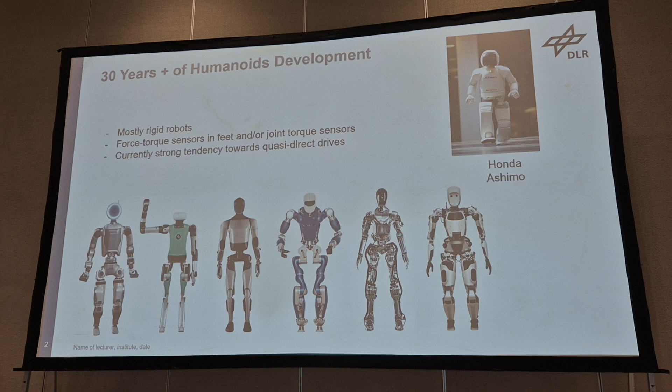Now, I wanted to talk a little bit about this topic of the humanoids, and also discuss a perspective where I would like also to hear your opinion about that, because it's such a timely topic. We see those very impressive robots downstairs, and we have developed this for maybe 15-20 years with model-based approaches. Now it goes more and more on learning, reinforcement learning, and other approaches.

And I'm asking myself, what's still the role of models and model-based control, and how does this interact with the learning approaches, right? The argument I would like to make is that I think that especially for the humanoids, which are also larger, not like the Unitree, which can easily fall down and break, having a solid model-based ground on top of which you put learning is the most stable or promising approach, right?

But I wanted to discuss also what's the technology, right? Because we started with ASIMO like 20 years ago, and this was a purely position-controlled robot with a ZMP approach and so on. Then what we pushed forward is something based on force torque sensing in the feet and in the joints, and a passivity energy-based approach.

Of course, we see the strong tendency towards quasi-direct drive, where you don't even need to model too much, because you hope that the reinforcement learning will take over and compensate for all the model disturbances. But on the other side, what we have done over a long time is a different approach, where we would like to control the energy and to store and recycle the energy. And I would like to give you some of the ideas in there and try to popularize this.

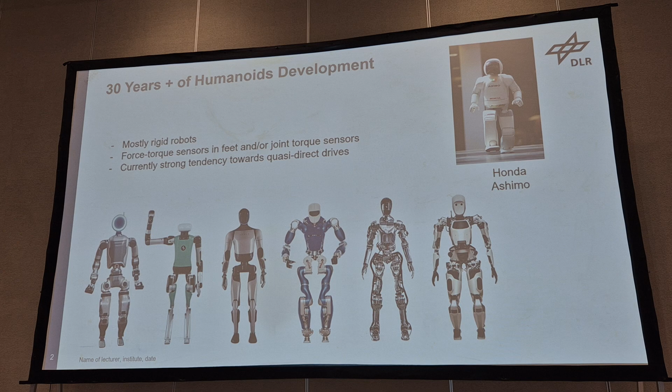So actually there were two trends, right? One is those rigid robots, and now quasi-direct, where you would like to have an actuation which transmits immediately to the rigid body model. And the other is motivated from this very early work, which shows that exploiting the intrinsic passive dynamic has some sense, right?

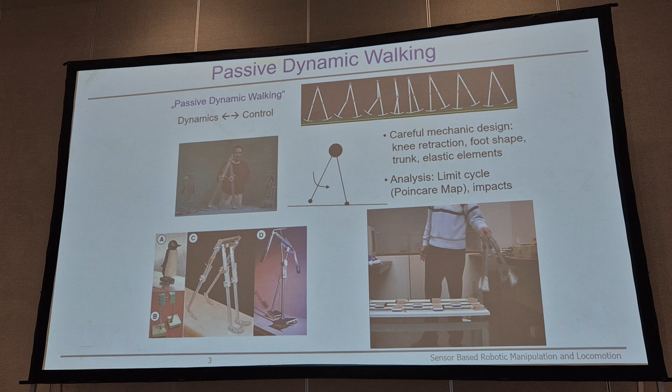This is a purely mechanical system driven by gravity, and then all this work which has shown that having springs and storing energy is useful, right? And also those Paralympic athletes, they use the energy of the spring, and they can run and jump farther and faster than even normal athletes, just because they learn how to exploit this energy storage. So obviously, having compliance reduces impacts and so on, has some advantage.

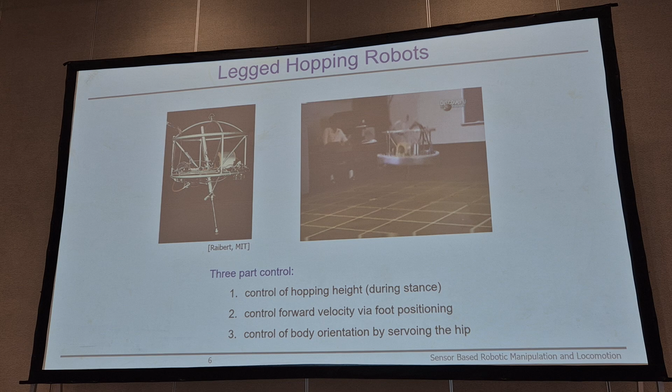We had here, however, the talk of Marco Hutter, and he said those simplified models were always a strong limitation. And now you can use reinforcement learning, model the full dynamics, and learn on that incredible behaviors, right? So how to reconcile? And actually, when robotics started, this is one of these famous videos of Marc Raibert, right? They had this concept of using compliance, using intrinsic energy, and having very simple controllers which just excite the energy in those systems. So what happens with the two directions?

And is there a way to reconcile this direction of rigid robots, where we have just rigid body dynamics and try to learn, and then the approach where you use intrinsic dynamics? And I think having an approach which models the energy flows and looks at those and uses them for control is maybe a key to that.

So the first part, I would like to say a little bit about how we are controlling our humanoids. Probably you are more familiar with the cobots, right? The cobot technology, where you have joint torque sensing and you have a very high quality torque interface, right? And you can use model-based control. You have compensation of friction, you have compensation of gravity if you want, and you have precise models of the robots, right?

And this was key for the development of cobots. If you know the KUKA lightweight robots, our humanoid TORO just has the joints of 4 KUKA lightweight robots, and then it was built within maybe 1 year. And I think a key contribution here was a paper by Christian Ott and Máximo Roa and others at Humanoids 2011, where he said, actually we could put together the whole methodology which has been developed for grasping and manipulation, and for locomotion.

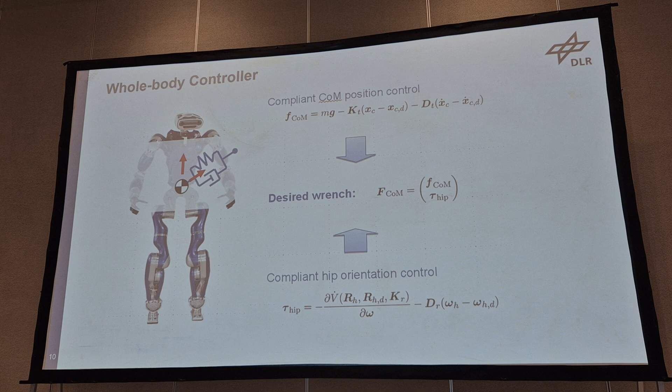So the most basic, simple controller which we have in order to control the center of mass is you define springs and dampers, so the classical impedance control for the center of mass, for forces and orientation. You have a desired wrench, right? Of course, you can very well describe the energy stored in that spring, the dissipation, and so on. So making a Lyapunov function and stability and convergence analysis is pretty straightforward.

And then what you have to do is to distribute these forces on the various contacts. It can be the legs, but it can also be multi-contact with the arm, and so on. You can use optimization tools, basically, and model the unilateral constraints, the friction cone constraints.

So basically, you have a force distribution problem, as you have the force distribution problem when you manipulate objects with hands, right? You need to distribute the object force on the fingers. Here you have to distribute the center of mass force on the feet and the arms. And then from there, you just use the Jacobian transpose to go back to the joints. So it's the same framework we applied everywhere.

And again, by monitoring the energy in the springs, the energy of the rigid body system, and constructing a storage function, you can prove dissipativity and stability and convergence and all these things, which are not a little thing, right? Being able to prove that the robot will always be stable and converge to a trajectory, I think it's essential for safety and certification aspects at the end.

And the approach, I mean, here you see some examples. This is Bernd Henze's PhD thesis. I mean, several best PhD Georges Giralt thesis awards came out of this framework. So what you see here is indeed this multi-contact, which I have told you about, right?

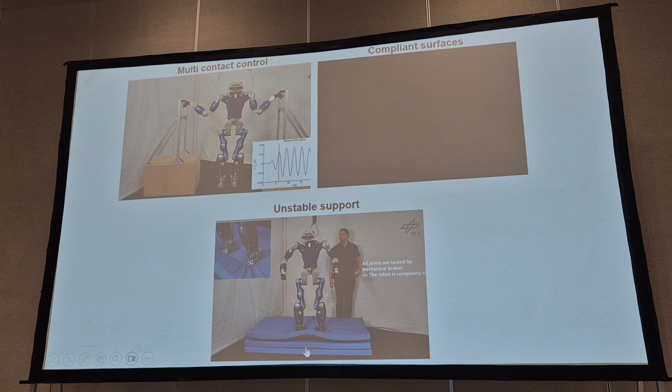So this mattress, of course, is a passive environment, so you can at least prove passivity and then stability and convergence. And you have all these hierarchical control approaches which have been pioneered by Oussama Khatib and Bruno Siciliano and the generation of roboticists in the 80s, but really working on the real system because you have this torque interface.

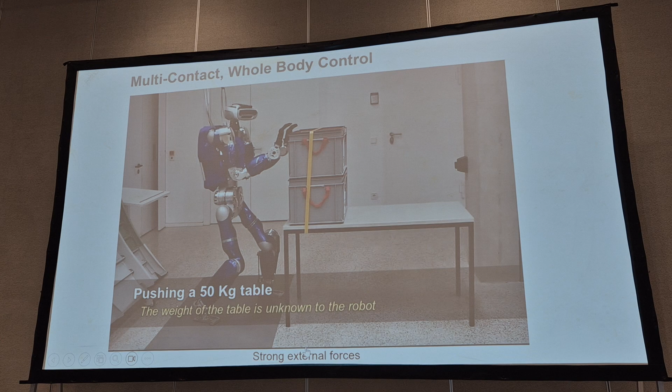And again, interacting with passive environments, right? You have a robot pushing a weight of 50 kilograms, and things do not get unstable because, again, you have full control of the energy in the system and the amount of energy which you inject.

And still staying in a model-based framework, of course, what do you do with the center of mass? You can control it to a certain point, but you need to do planning too, right? And actually we came up with, I think, a very clear and straightforward way of implementing a planner for the center of mass. The point with the center of mass is that half of its dynamics is unstable.

So it's a simple second order dynamics like over here, right? But you can split it into a stable and unstable part. The unstable part is just the pendulum falling down, right? And well, I cannot really go into the details, but the contribution of this framework is that instead of dealing with dynamics, so with differential equations, you know, computer science people don't like differential equations so much, they turned it into a geometrical problem.

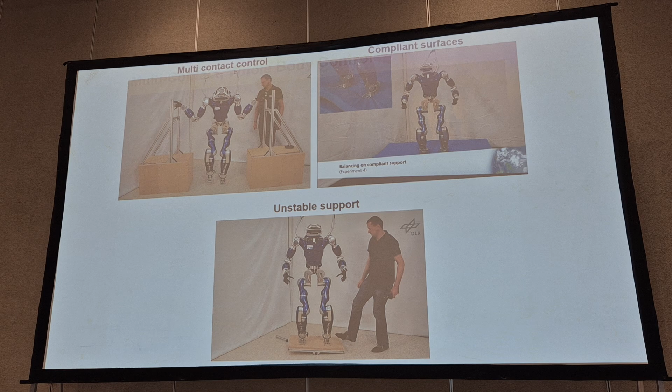So basically, people say that if you walk on a mountain, you can close your eyes and then do 3 steps and then you will stop. Because human planning is kind of 3-4 steps ahead, right? So that's what we do here. When we do step planning, you would do a planning of 3 steps ahead. So from the final destination, you could integrate backwards in time, and then your unstable part becomes stable.

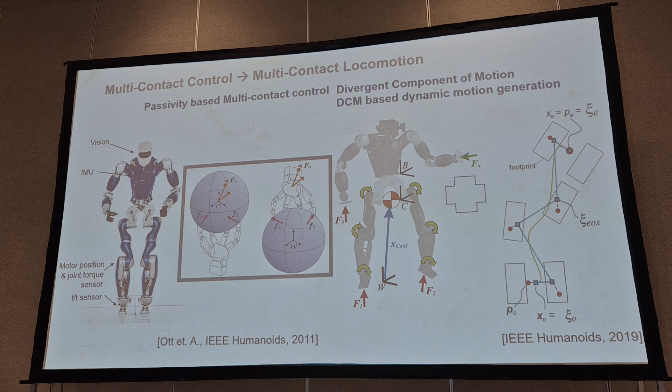And the contribution of George Mesesan was to show that you can write this all together in a system of equations, the forward and the backward integration, and you can solve it analytically in microseconds. Right? So this kind of 3-4 step ahead planning, we have even closed analytic solutions for that, for the COM planning.

Again, don't have much time to go in the details, but I think the essential point is, you have one unstable part, one stable part of the dynamics, invert the direction in time of the unstable part from your planning horizon, for your 4 or 5 steps. And you have to do the iteration forward backwards, and then you have 2 stable dynamics, basically, and you can compute. This is a RAL paper of George Mesesan, 2018, where he presented this framework.

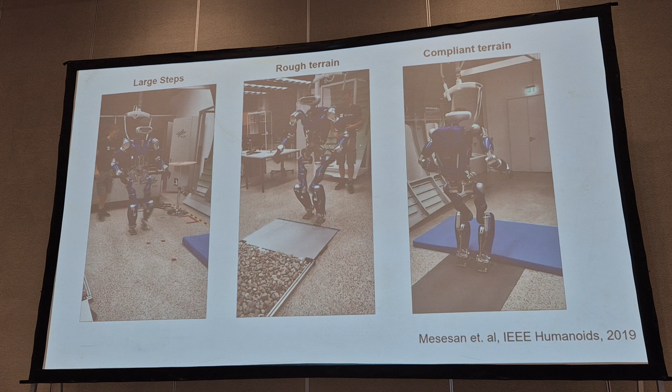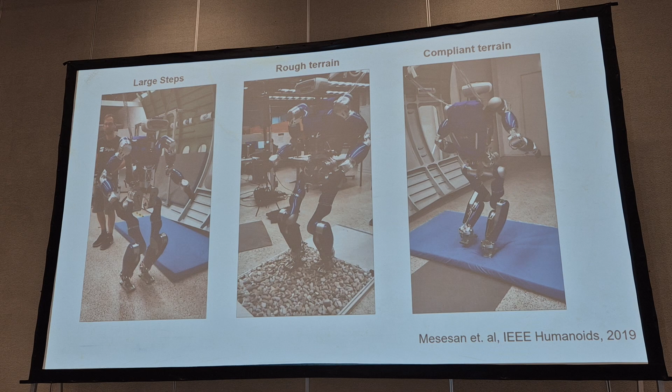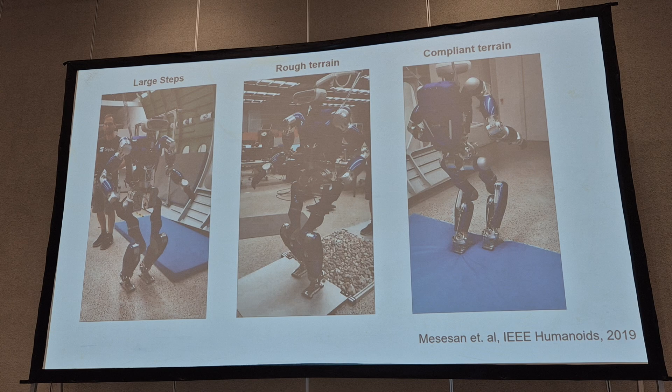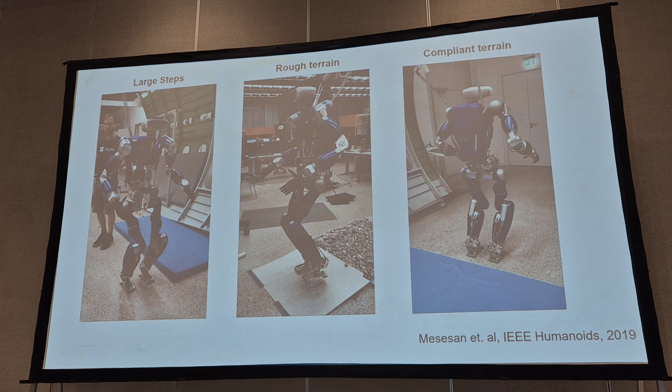And then these are the solutions, again, purely model-based, and you can walk on the mattress, on uneven ground. It works very, very stably. You can even interact with the robot. That's another thing, in contrast to inverse dynamics approaches, where interaction can cause problems because you don't have the effect of the interaction force. These passivity-based approaches are very robust with respect to interaction with passive environments.

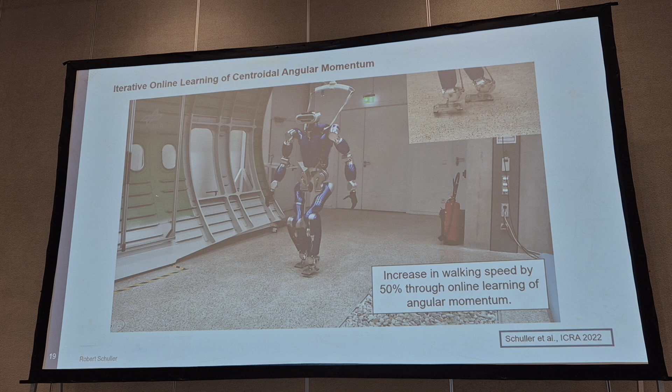And okay, what about learning, right? I always tell my people, in order that people believe you today that it makes sense, you need to put also the learning on top to see what's the contribution. And of course, if on top of these very passive approaches, you start learning, iterative learning, reinforcement learning, to increase the speed, to increase the versatility, you still stay in this stable framework. You can prove on the lower level that you fulfill energy constraints, the contact constraints, and so on, and you can increase performance by learning.

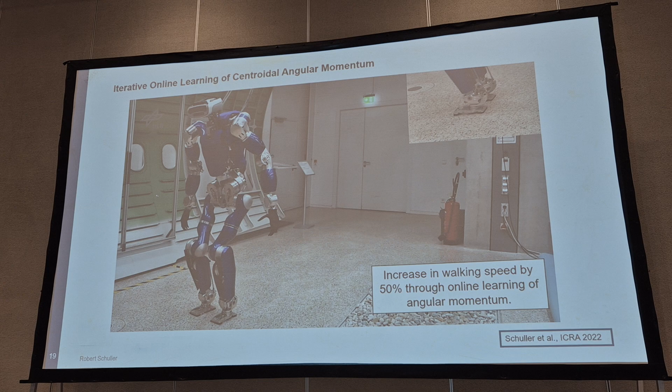In this case, we have a limitation of the speed of the joints, so this technology, in contrast to direct drive, is limited in terms of speed, so Toro is not able to run. That's whatever you do, no matter if you use model-based or reinforcement or whatever. Unless you are a wizard, you won't make these robots run. But you can go at the limit. And the other point is stability, right? You still see those robots hanging on the cranes.

So one big question is, how will we be able, under the current regulations in Europe, and I don't know what's the situation in China, but in Europe, if you would like to have a humanoid running in your home and you have kids crawling on the ground, you need to prove at some point that the robot won't fall over your kids and kill them, or hurt them. And this is a difficult question to convince those agencies.

And of course, there are all these different model-based approaches to provide balancing. The question is, can you make it so simple that you can prove to a non-roboticist who does certification that you fulfill the bounds? And humans have all these different strategies. You have this ankle balancing, and then if the perturbation gets bigger, you start balancing from the hip, and then you go down in your knees. This also lowers your center of mass and makes you stable, and then you make steps back. You start moving your hands and so on.

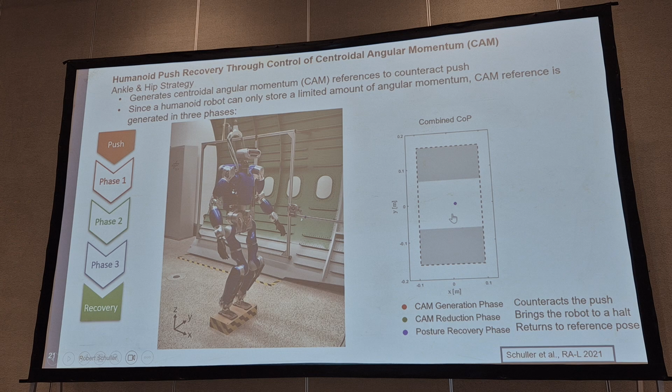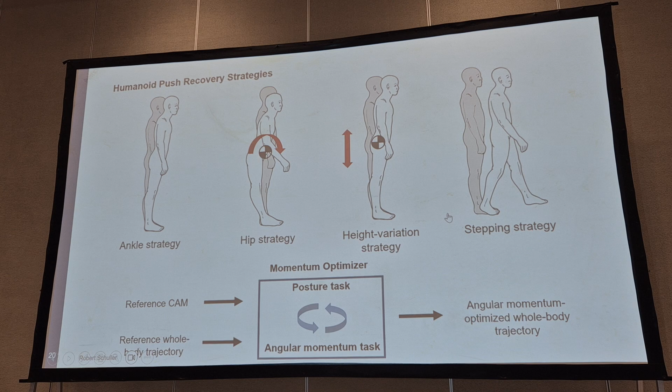Okay, so just to understand what's going on. In this case, for the robot balancing on a rectangle, the condition is relatively simple. The point has to stay in this area, which is bounded by the feet. And when the robot approaches the end of this area, it switches between different phases, right? So, as I told you, you have the ankle strategy. At the beginning, it starts just balancing the ankle. If you come towards the limit of this region, then the robot starts with the hip and with the arms. In this case, it won't do any steps, but it's doing all these compensations.

And in the next video, you will see, it even works on one foot, right? And this video shows also the switching between the different posture recovery phases. And even for that, you can show, as long as you are not going into limitation of torque or velocity, and as long as you stay in this area, your robot will be robust.

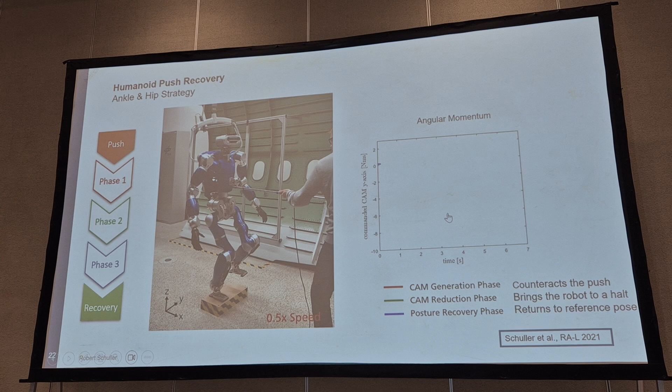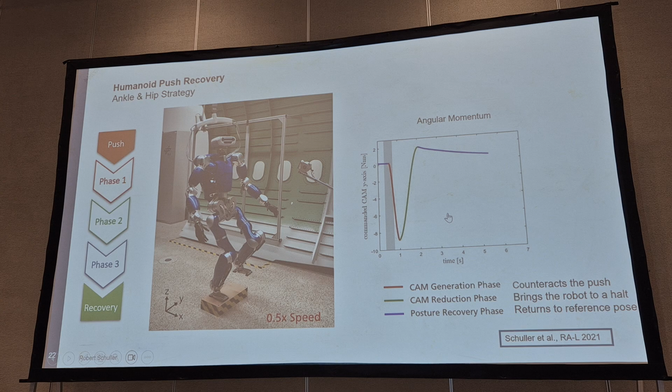And you see, although we have these recovery strategies based on simple concepts, complex whole body motion emerges out of very simple principles of maintaining stability, of using your degrees of freedom to keep your energy bounded and to keep your balance. So this looks very natural, although there's no planning, there's just the control-based reaction. And here's some more videos.

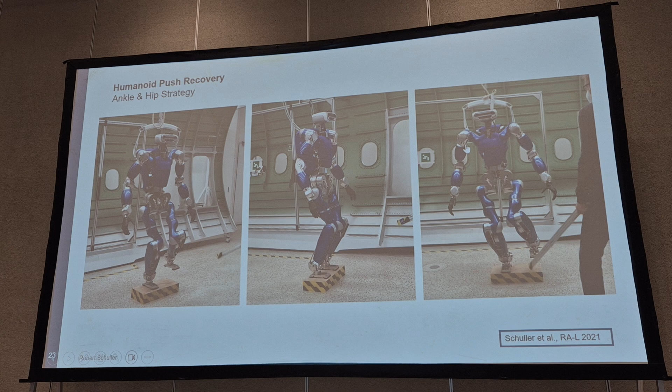So you see, you push it from the side, the robot rotates, and this comes from the very basic first principle motivated approach. And passivity-based control also means you can interact with the robot, right? Robert is pushing with the stick at the beginning, of course, because he's cautious. With a new method, you should be cautious. But I told him, you should actually show that you can go and touch the robot. It's not that the robot is going to go crazy. You can go there, touch it, and you have seen also the step recovery at some point.

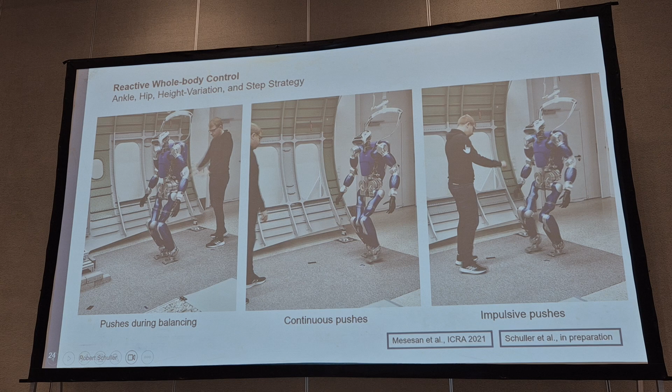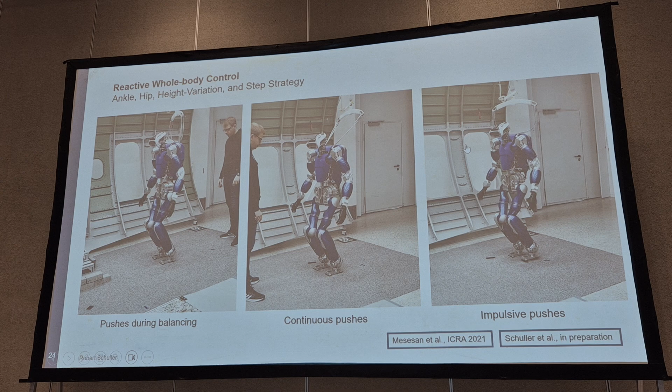And I think on top of that, the way you plan, do strategies and react to complex environments should be learned on top with reinforcement learning. But then you don't need to care about the stability of reinforcement learning as long as you show that your geometric constraints are fulfilled. As long as you learn within these boundaries, you cannot fall over. The learner can do better or worse, but at least it won't tip over. So you explore in a space of feasible solutions instead of a space of everything. Still, we need to prove that it's more efficient, and this is work which is going on, and I hope we soon can provide results.

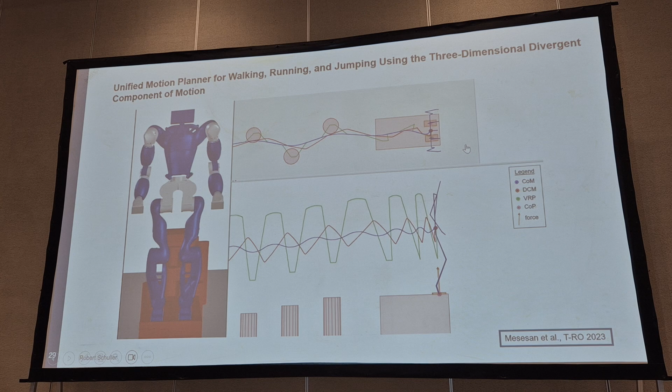And as I told you, Toro cannot run. So we can simulate how it could run and show that the framework could do it in principle, and we hope to build a robot now which can run; one of the robots you can see downstairs. We have the PNDbotics Adam robot, and we transfer the approach onto that robot, and I hope we can show that the same planning framework can be used for running. Okay, this is my part one. I spent too much on it.

Let's go to part two, exploiting intrinsic dynamics, where you would like to go even deeper and while running not dissipate energy every time you touch the ground, but store energy and have a continuous control of the potential energy stored in the elasticity, kinetic energy, actuator energy, dissipated energy, and so on. That's the idea, because if you look at this kind of running, this is still different from what we saw downstairs in the exhibition and have seen before.

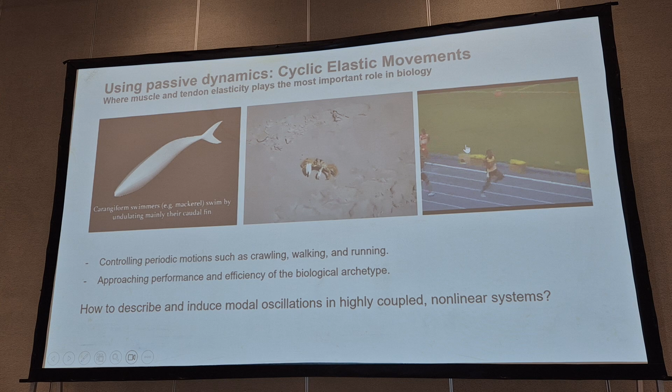And biological bodies are compliant, and nature seems to exploit it. Now the question is, is it just a bug because nature could not come up with rigid actuation, or is it a feature? Is the elasticity in our muscles and tendons something which makes biology more robust? And this is the topic I explored.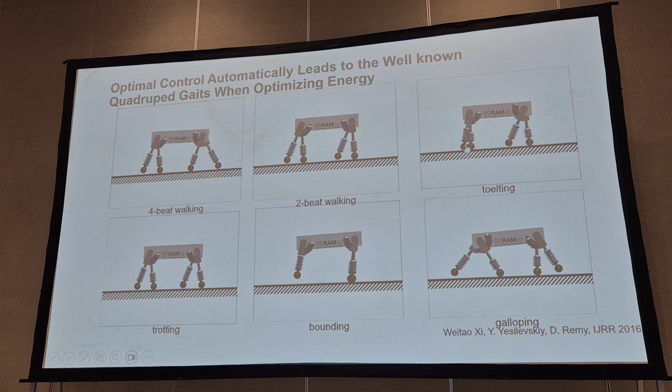The point is, such a system, if it's conservative, is chaotic, right? If you look at each leg as a pendulum, they are chaotic systems. So we see this nice oscillatory behavior like here. How does biology succeed to make these periodic oscillation motions out of a system which is potentially chaotic? This is the question which we posed ourselves. We use differential geometry to model that in the first instance.

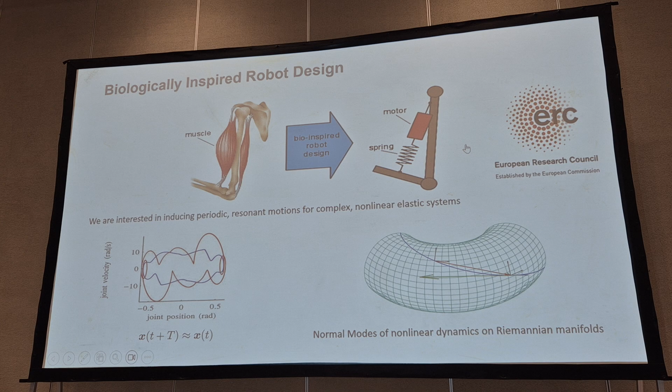I had also an ERC grant which ended last year. Of course, you want to model the elasticities of tendons and muscles with springs and dampers and rigid bodies, and then look for periodic trajectories of this. So this was my main topic of the ERC grant: how do you describe periodic motions of such systems? This is the analogy, of course. I think it's pretty clear for people used to think about energy and models of systems.

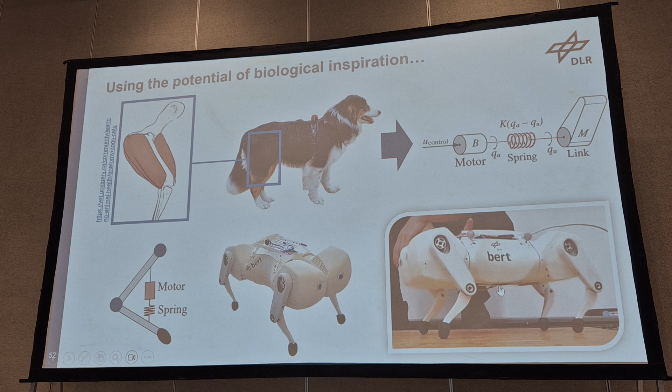And this is some robot we built. It's not a great quadruped. It's not competing with a Unitree quadruped, but it's built using 3D printing and RC servos. The idea is to have elasticities in the joints. We build in some springs to research how you can use these elasticities. And you see here, the motors are fixed. So this is the mechanical compliance of the system. It's very compliant, similarly compliant to how biological muscles are.

Okay, so you want to make the system run in resonance. We all know linear modal theory, right? It's what every engineer learns. But linear theory is not useful for running, because running is high amplitude. You're not in the small oscillation linearization regime, but you want to oscillate at your maximum possible amplitude. So linear oscillations, we all know.

You do eigenvalues and eigenvectors, and if you excite along an eigenvector, you will always stay on that eigenvector. Second order system, right? You have two eigenvectors. You give it an initial condition, you will stay on that line. If you plot it in configuration space, these are just straight lines, and you will oscillate on those straight lines. If you plot it in position and velocity, there will be ellipses in that space. This is just where we start from.

If you have two masses, this is from a paper I wrote together with Cosimo, then one mode is in-phase oscillation, where both masses oscillate in phase. The other mode is anti-phase oscillation, where the masses go one against each other. And you see here in state space the two lines. What happens if you have a double pendulum with nonlinear couplings between inertias and so on? Do you have something like modes as well?

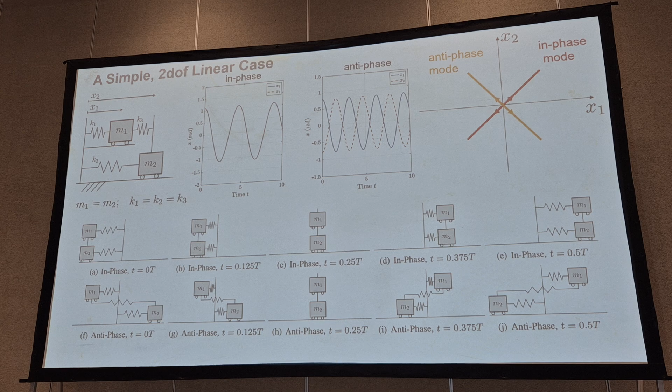The answer is yes. The only difference is that instead of oscillating on a line, you oscillate on a curve. It's still an unproven conjecture for 80 years of mathematics. There are long proofs on arXiv, not yet published, that indeed for any n degrees of freedom system which has n linearized modes, you will have also n nonlinear modes.

Without having a proof, we have a MATLAB toolbox to find them. You give me the system and the equilibrium point, I will give you the n modes. So practically it's there, but the conjecture is not mathematically fully proved. You will find a lot of papers claiming that they prove it, but obviously it's not completely decided.

Now, what do those modes look like? If you increase energy for a linear mode, you are staying on the line. For the nonlinear mode, those curves start to bend because you move on some manifolds. Without going into details, if you see it in 3D, one of the modes is pretty linear. You see it starts bending at the ends. But the other one is really nonlinear, and it's oscillating quite strongly.

And the more you increase the energy, the more nonlinear it gets. But if you cut it with a horizontal plane, it will be one oscillation at one energy. And you see that you can go to higher and higher energy and still stay on those modes. So the idea is to find them and exploit these oscillation modes.

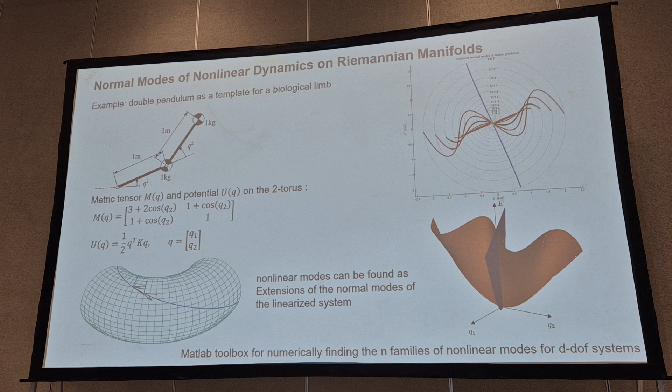They are all for conservative systems. That's a limitation. So you have to go from the conservative modes and just compensate energy, and the hypothesis is that you have a system which has so little friction that this description of the nonlinear oscillations is good enough.

And this is for, let's say, a leg or an arm. These are the two modes, right? You can see what they do, right? And actually, we use them, right, for throwing balls or for running. One mode is just like this, and the other one is like this, not surprisingly.

And you can use them to swing up a double pendulum to this position. You can always go along that mode. So I think they are pretty useful things if you want to be energy efficient, right? Stay along these natural modes, right?

And then we took the model of our quadruped robot. First of all, fix the legs to the ground, so put, you know, ball joints to the ground. Then you have just 6 remaining degrees of freedom. And these are the 6 modes the system has, right?

So you start from the linearized modes, from the small amplitude oscillation, and then you increase the amplitude, and look what the robot is doing. And it's doing this kind of things. Looks like what? Maybe you have some ideas which kind of motions the quadruped would have.

And well, the control idea is then, if you have those modes, you just need to inject the dissipated energy. So instead of going in 1 millisecond and controlling the position every millisecond, you just give it the energy and let it swing at this natural frequency. If the natural frequency does something meaningful for you, which means you are also doing a co-design, right?

Because if you build a robot which runs, you should analyze its modes in simulation, and then maybe change the mechanical design, change the controller, until the robot more or less runs by itself, and you then just have to kick it at the right time, right, and in the right direction.

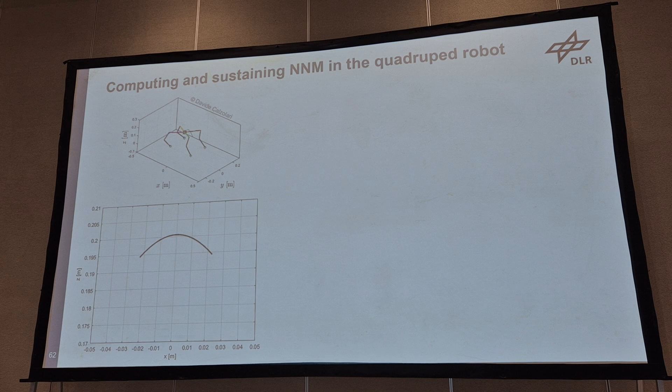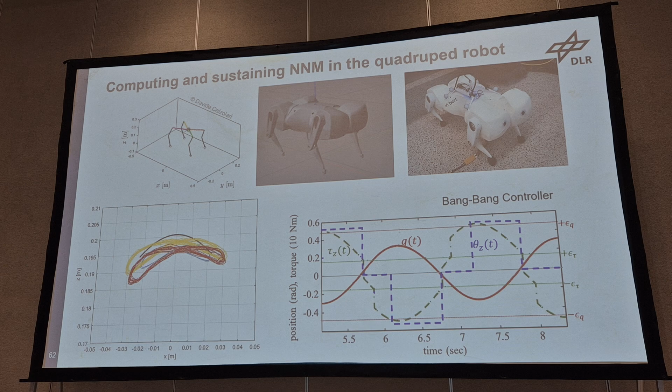Okay, now this is a validation that those modes, if you do it in simulation, you can find them. If you put friction, then they still stay close, but they have some hysteresis. And then if you do it on the real system, they still stay close, and you can just excite them by kicking the robot a little bit at the endpoints, right?

And then, this is a paper which is still in the review process. You're just exciting by kicking them, and it's doing these things. And if you release the feet and just give it also some forward velocity, they start to develop into gaits, right? It's not a perfect gait, but they all develop into gaits. They start moving in this oscillation pattern.

And then we had some experiments on the real robots, and you do exactly the same thing, and the robot starts walking. The two modes did not work because our actuators were just too weak, and the belt started to slip, so that's why we could not implement these two. But all the others, we just excite modes, the robot starts to walk, as you see, in different patterns. So one mode goes into a gait, the other goes into bounding.

Well, this one we call the sewing machine mode. I don't know if it's really useful, but it's maybe due to the fact that our mechanical design is not ideal, right? This is what our robot can do. They have equal springs in all joints. You can do better on the design, but it's just exploiting the oscillations of the system. And these are some further examples where you use just this intrinsic simple oscillation to generate gaits.

Well, how much? Okay, time is over. Then I won't go into the details of the geometry.

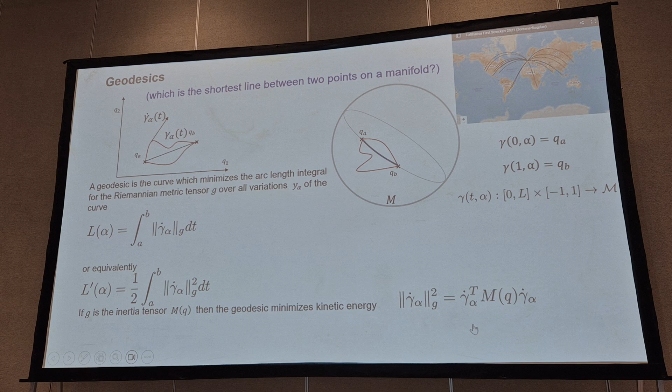Just one main statement. What's the mathematics behind, and why do mathematicians have such big difficulties? Basically, there's a concept of geodesic curves, or shortest paths on manifolds, and you can link this concept over an energy concept to geodesics. So intrinsic motions of robots are geodesics along special manifolds, right?

I won't go into the details, sorry, it's too long, but actually finding periodic motions is finding geodesic curves on some manifolds, right? And this is a very classical topic in mathematics, and you can exploit a lot of things. How many of you know the book of Arnold on differential geometry?

I was intrigued by a statement. This is a picture from the book of Arnold saying, for every double pendulum, you will find a periodic trajectory doing m turns around one joint and n turns around another one. And there's a simple proof. Basically, it's just because you can wrap a string n times around the torus in one direction and the other, let it contract, and it will be a geodesic, so it will be a trajectory of the system.

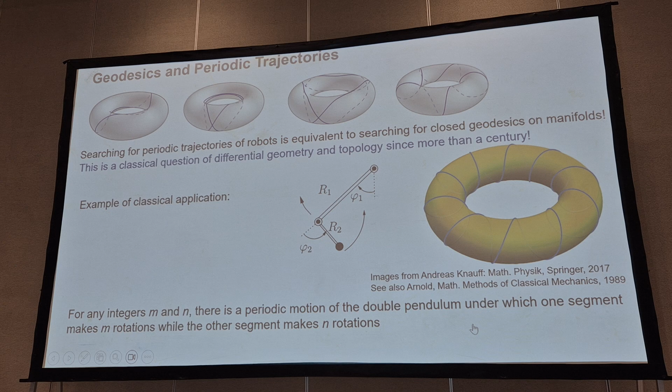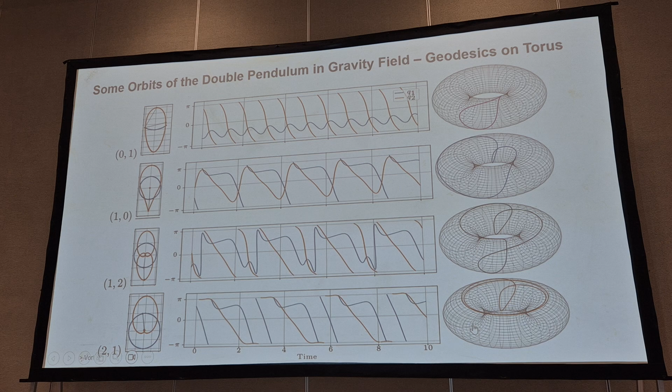It's that simple. So it's a relation between geodesics and trajectories. And using this tool, you can find not only these modes, but a lot of other modes, right? So Arne, one of my PhD students, has a toolbox, and you just take strings, let them contract on the torus, and you will find periodic trajectories. Like for the double pendulum, not only those spinning back and forth, but all these motions you can do, in principle, at zero energy, except for compensating for gravity. Right? And there's plenty of them.

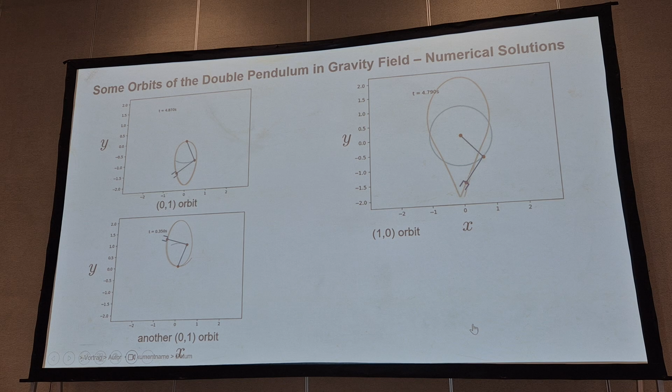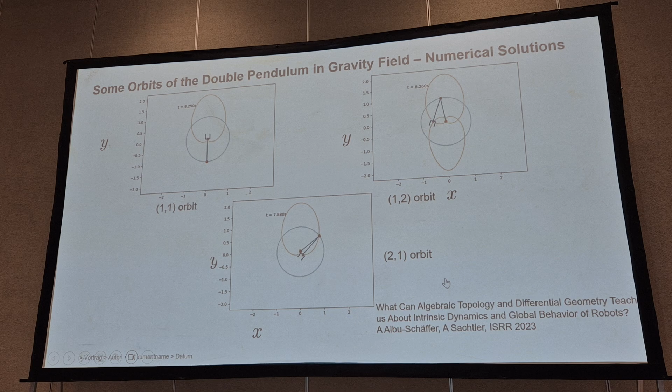You remember we discussed the system being chaotic. Yes, it is chaotic, but chaotic systems have a lot of periodic solutions as well. You just need to know how to find them. And now we are building a direct drive double pendulum to really recover this. Also, Manuel is involved in this work. Simulation is nice, but I want to see them in reality, that you can do these kinds of things forever with a small battery at almost no energy cost other than compensation. And there's plenty of them, right?

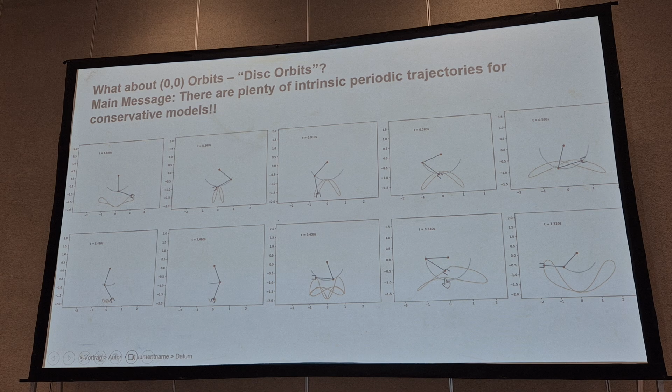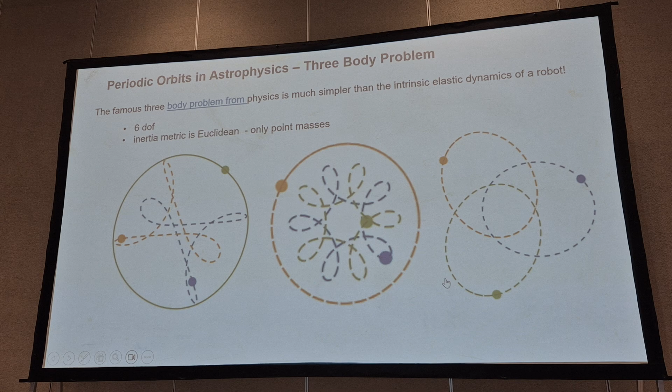There's plenty of them. I don't know if you've seen the Rain Man movie, when he's counting cards and saying, don't worry, there's plenty of, I don't know what he was looking for, aces. There are plenty of periodic trajectories in a non-linear system. You just need to know how to find them. Interestingly enough, the three-body problem is the same question. The three-body problem is a chaotic system, but you will find on YouTube a lot of images where, using similar tools, you can show that three-body problems can be periodic, so there could be stars doing this kind of three-body ballet periodically.

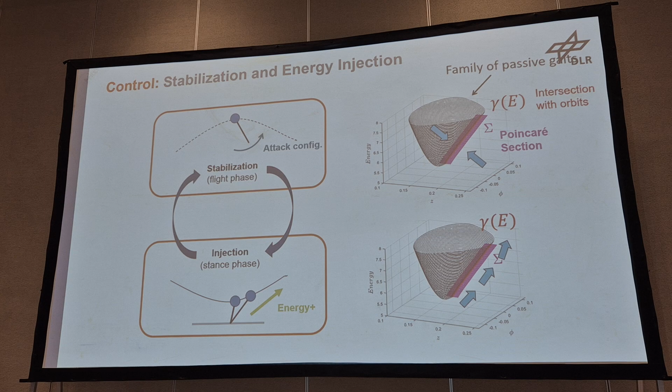Okay, and the last is Davide Calzolari. He used this concept of periodic orbits which increase with energy, and has a controller where on one side you inject energy, and on the other side, for each energy, you stabilize on the periodic orbit which you found. And he could show that you can stabilize that again with very simple controllers, stay on this tornado, as we call it, of periodic orbits, and inject energy to increase energy the way you like. And this is his controller, again, exciting the intrinsic mode.

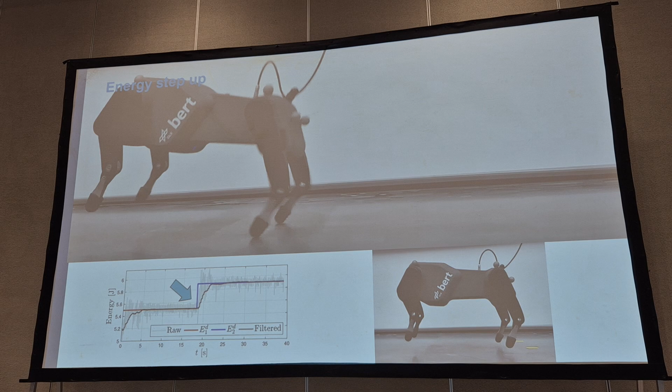And then, of course, you can do learning on top of it. I want to show just the final video. These are three approaches on the prototypes we have. One is with the linear modes, one is with these circular modes, and the other one is with reinforcement learning. I won't tell you which is which. The reinforcement learning is the slowest in that case, but I'm not sure that you could not do better. But I'm happy that we have three PhD theses exploring three approaches: learning, linear modes, non-linear modes, end-to-end, so these brake orbits and these tornado orbits, and they all work effectively on the system.

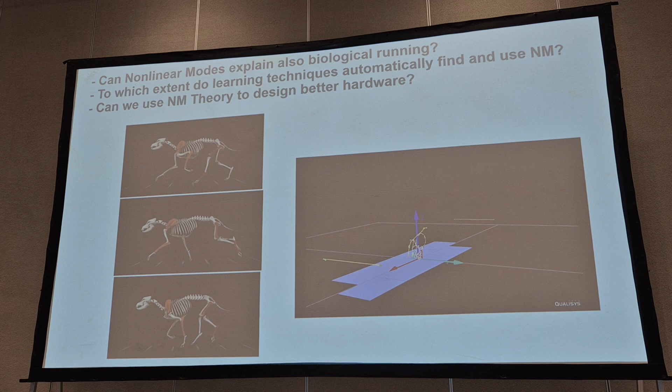Are we there? No, we are still far away. This is motion tracking for a dog. But I still think that considering energy and energy storing methods is a better way of describing that than just learning purely motion tracking and transferring it on the system. Thank you. We are still far away, but maybe you can get some. Yeah, thank you very much.